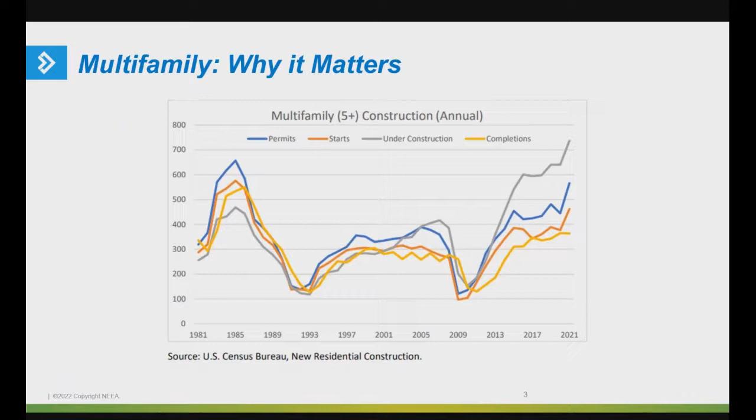So quick agenda for today. We're closing out the intro now. We're going to go over to Rob Aldrich from Steven Winter Associates, and he's going to give us a little bit about heat pump water heaters in multifamily buildings, focusing on integrated units and the unique challenges there.

After some questions with that, we're going to go over to Duane Jonlin from the City of Seattle, and he's going to give us a little bit of a case study and some structural changes, an innovation to the structure of the code itself in Washington related to low-rise multifamily. And I'll provide a little cameo at the end of his presentation as well. After some more Q&A, we'll close it out and call it a day. Next slide, please. All right, so now I want to pass it over to Rob to start with our first presentation.

Thanks. My name is Rob Aldrich. I'm an engineer with Steven Winter Associates. I'm in our Connecticut office. We work on the East Coast, Northeast, Mid-Atlantic, offices in Boston, Connecticut, New York, and DC. And we focus on better buildings in lots of different ways. We're about 140 people all told. We focus on efficiency, sustainability, health and resilience, accessibility. I'm here to talk about a very specific topic, and that's heat pump water heaters.

And as Kevin said, integrated tank heat pump water heaters. This is the type of product I'm talking about. It's a tank of water with a heat pump on top of that tank of water, which extracts heat usually from the surrounding air and moves that heat into the water. The first kind of evaluation project I worked on was here in Connecticut back in 2001. And this technology has kind of come and gone over the years. There were some improvements needed with the products that we evaluated back in 2001, but to a large degree, those improvements have been made. Products now are a lot better, a lot more reliable than they used to be.

I do want to say my experience is really mostly in the Northeast, New York and New England, in colder climates, climate zones 4, 5, and 6. I'm going to try to generalize for the whole country, but do keep in mind that my perspective is a little bit tempered by challenges in cold climates. So I want to just put that out there up front. So I see a lot of screw-ups with these systems applied in multifamily buildings. Very often in the Northeast, we see them installed in the basements of single family homes, and they usually work pretty well.

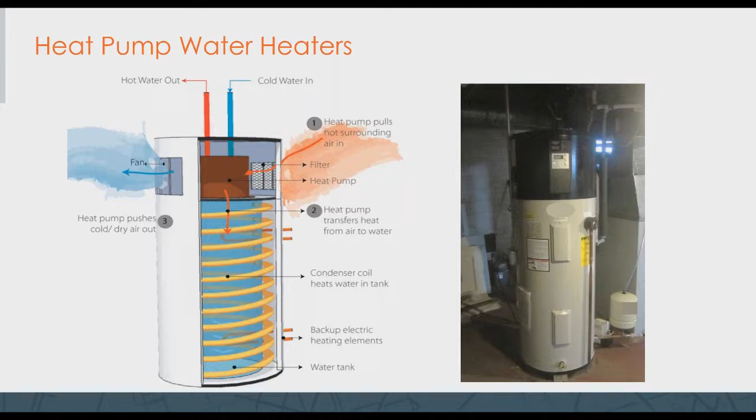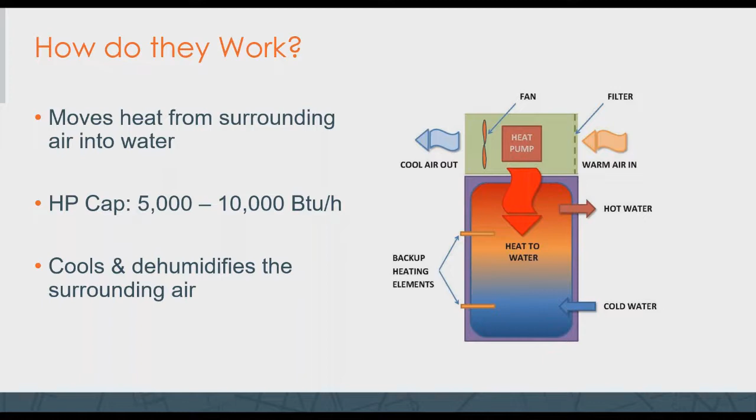I'm going to say this again because this is what I think people miss: these devices extract heat from the surrounding air, or sometimes you can duct the air to them and from them, and they move that heat into the water. That means that they cool and dehumidify the surrounding air. Sometimes that's great, sometimes that's not so great. I also want to mention that most products do have backup resistance heating elements that will kick in when the heat pump cannot keep up with demand, or when the incoming air is just too cold for them to operate.

I'm hopefully not beating a dead horse, but integrated heat pumps remove heat from the incoming air and transfer that heat to the water. That means the air coming out is about 20 degrees cooler. So if the incoming air is 70 degrees, we have somewhere around 200 CFM of 50-ish degree air coming out.

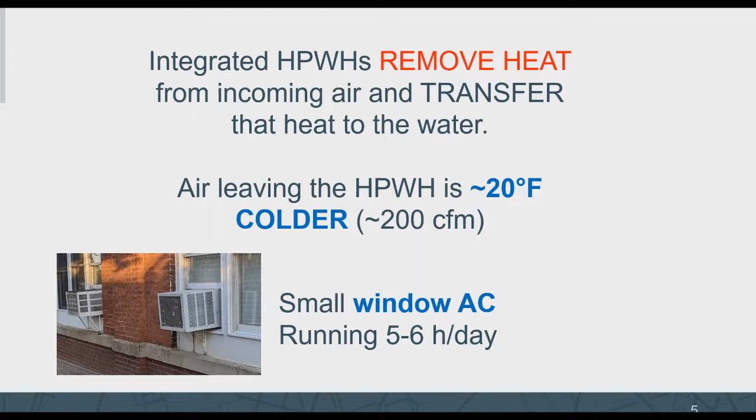One analogy that my colleagues told me really hit home for them: it's like running a small air conditioner 5 to 6 hours a day. If you have a heat pump water heater in the basement of your home, it's like running a small window AC 5 hours a day. It's a significant amount of cooling if the heat pump is doing all the work. And that is the factor that I see people miss, and they misapply this technology.

So again, these can work very well. They can be very efficient. The key to the efficiency mostly has to do with limiting the use of that electric resistance. As I said, there are backup resistance elements in most of the tanks. You can do that in several ways. One is a bigger tank, so you have more hot water to use before the resistance has to kick in. You can keep the water hotter, as long as you install anti-scald valves so you don't scald people. If you have hotter water, you can go longer without kicking in electric resistance.

And certainly warmer intake air helps. The minimum for these to operate with R134A, which is what most of the ones I'm familiar with still use, is in the 40s; the heat pumps stop working efficiently in the 40s. I think below 40, you're not going to get anything at all from these systems. And warmer is better. Certainly the warmer the intake air, the more efficient these things are.

And of course, another way to reduce energy use is to use less hot water. And it also makes these more efficient. If you use 150 gallons of hot water a day in a single family home, this is probably not going to keep up. If you use 30 or 40, there's a good chance the heat pump could keep up with the entirety of that load.

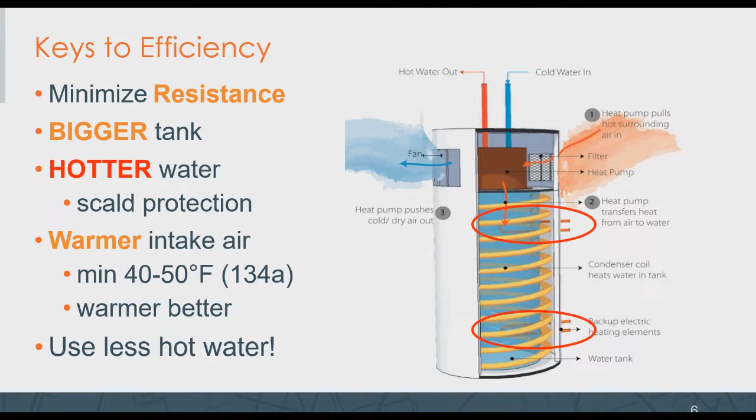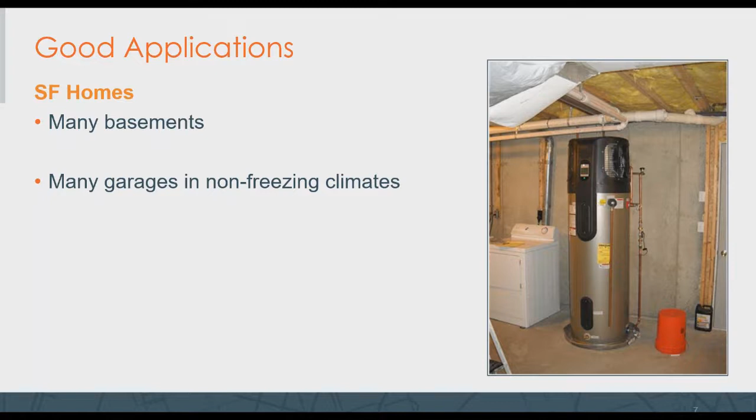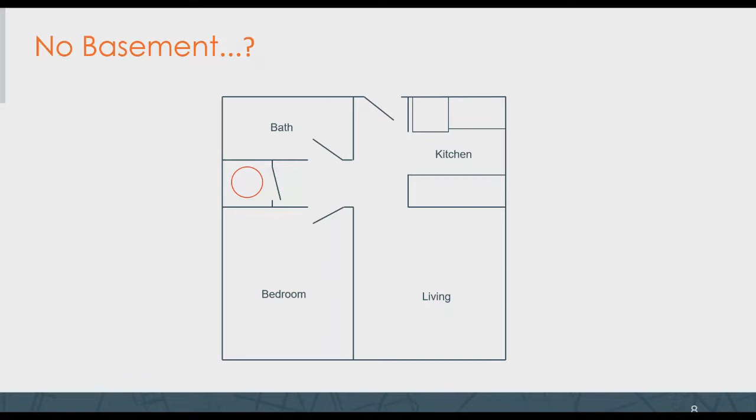So good applications: a lot of basements of single family homes in the Northeast. I know a lot of people put them in garages in non-freezing climates. I get very nervous when people put them in garages in upstate New York, but in a lot of the country, garages are certainly a practical application. If you don't have a basement, you don't have a garage, if you're in an apartment, then what do you do? This is just a very simple example of an apartment plan. Too often, I see people try to put them in closets in multifamily buildings. And this is almost always a bad idea in my experience.

He was saying, God, the utilities begged me to put these in. They were throwing money at me, paid me more than it cost to put them in. So I finally put them in. It was a train wreck, had to rip them all out, put in electric resistance. I'm never using heat pump water heaters again.

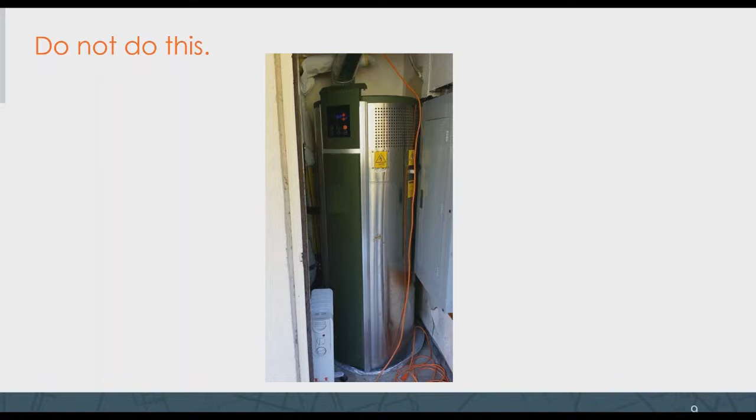So one proposed solution is to put louver doors on the closet door. I have not seen this work personally. I still see that closet getting down to 50 degrees or below, where the heat pumps cannot operate efficiently. This is 200 CFM, and you need a way to really actively move air in and out of this closet. In my experience, just passive airflow through a louver door doesn't cut it.

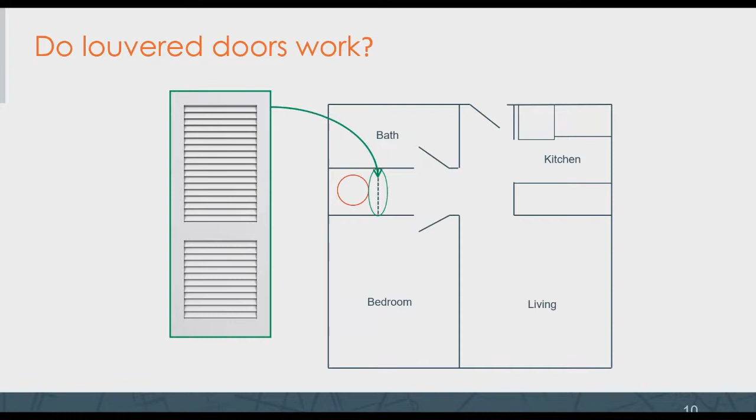The other issue louver doors raise is sound. These things are not silent - they're fairly loud. I think all the ones I'm familiar with are in the 50 decibel range, maybe higher. They're getting better, getting quieter, which is great. And 50 decibels is not hugely loud, but if it's right next to your bedroom and you're trying to sleep, it may be too loud.

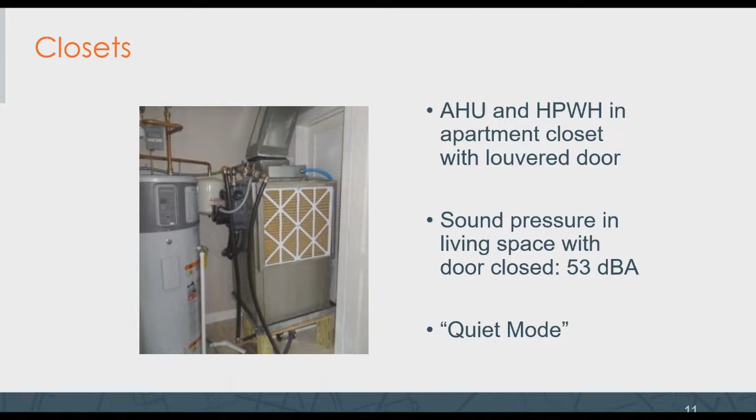This picture is taken with the louver doors open in an apartment. You can see a heat pump water heater on the left and an air handler on the right - I won't comment on the ducting for that. With the louver doors closed, the sound pressure in the living space on the other side was 53 decibels. I've heard building owners having bad luck where residents get frustrated with the noise and switch their water heaters into resistance mode, or quiet mode, so they can watch TV and sleep without the annoyance. So sound is definitely something to think about in multifamily buildings.

So ducting is sometimes presented as a panacea that solves all the problems related to water heaters and closets. If you exhaust the heat pump water heater into the living space and have a louver door allowing makeup air back into the closet, thermally this could work. You might get some short circuiting, but generally you'd probably have enough warm air coming back for the heat pump to operate efficiently. This doesn't solve the noise issue, and you also have about 200 CFM of 50-degree air blowing into the apartment, which may or may not cause comfort problems.

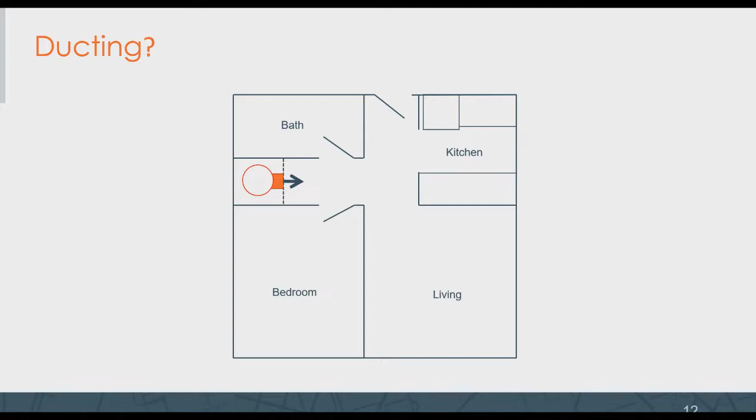If you don't have a louvered door, maybe you soundproof the closet with a gasketed, caulked tight door, and duct both the intake and exhaust. Again, thermally you might be okay, but you're still providing 200 CFM of 50-degree air into the apartment, and you have to figure out how to do that without causing comfort problems. You might get some sound propagation through the ducts, but if you duct it thoughtfully, you can eliminate a lot of the sound problems.

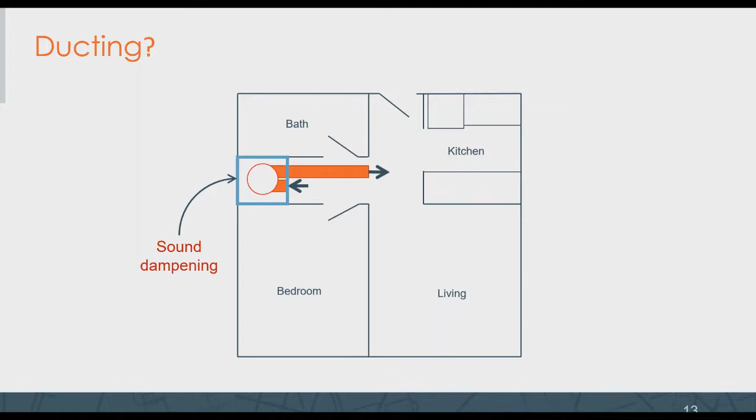This is also very climate dependent. 200 CFM of 50-degree air in a Miami apartment could be great year round. In Chicago, it might be nice for a few months, but for a good part of the year it could be a real comfort liability. So you have to be really thoughtful about how you incorporate these into apartments.

This is an example of what I'd call a qualified success - a project in Connecticut, a gut renovation of an old mill building converted into about 80 apartments. Every apartment has a heat pump water heater in the closet, and you can see one side was ducted - this is the intake to the water heater.

There's some flopping flex duct that could be improved here, but the exhaust came out of the water heater into the closet. This is a fairly large closet, but there were louvered doors separating it from the rest of the apartment, and that cool air just kind of oozed into the apartment, mixing with the air in the living space.

And in general, it worked okay. I talked to the building manager here and got great information from him. He said there were a few apartments, 2 or 3, where the sound and the cool air really were unacceptable to the occupants, so he had to switch them into resistance mode.

When it got cold, and this has been occupied for a couple winters now, going into the 3rd winter, there were a lot more problems. There were more complaints, both comfort complaints and performance complaints, which I don't quite understand. The heat pump water heaters weren't keeping up always, but there were enough complaints that he ended up switching a lot of the water heaters over into resistance mode.

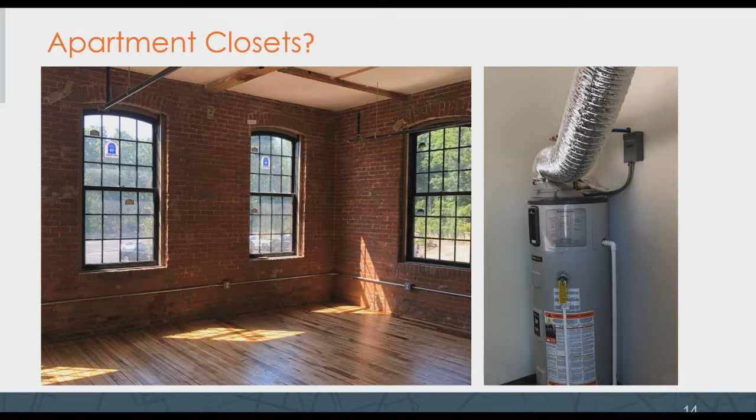Ducting to outdoors is something I never recommend in a cold climate, at least with the equipment we have now. In milder climates, it may be viable. So think about your climate, think about your application.

One thing I see people propose is ducting just the exhaust outdoors, which I think is just a very bad idea almost everywhere. You exhaust 200 CFM outdoors, that means you're drawing in 200 CFM from somewhere. Where is that makeup air coming from?

Is it 10 degrees outside? Is it 90 degrees outside? Is it coming from the hallway, from your neighbor, up the garbage chute from the parking garage? Uncontrolled infiltration is not a good thing. So ducting to outdoors has some challenges.

Check time. All right, I'm in good shape.

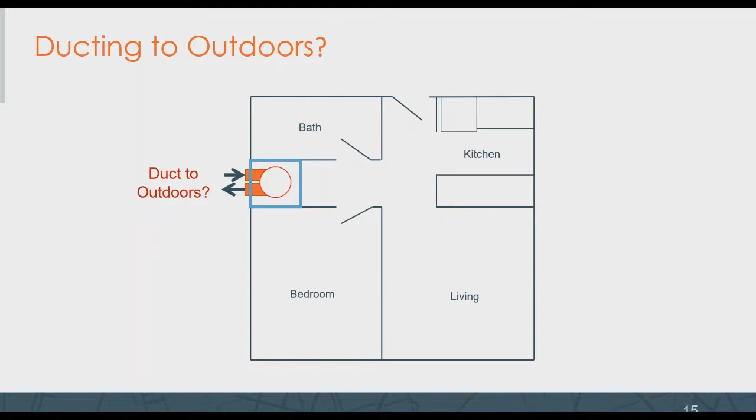If you exhaust the water heater into the corridor and have a louvered door so that air can come back into the closet for the water heater to work, this, I think, has some promise, but I have not seen any kind of real detailed results from this.

You are cooling off the corridor a lot, and that's something you have to think about. You're going to be adding a heat load to this corridor, and that heat load should be addressed as efficiently as possible, not with electric resistance, or else you're defeating the purpose of the water heater. If you have continuous, year-round cooling to your corridor in Texas versus Montana, it's very different, very different can of worms.

So this is one of the things I wish I had some real data on how these systems perform. But anyways, I think it's potentially a promising application.

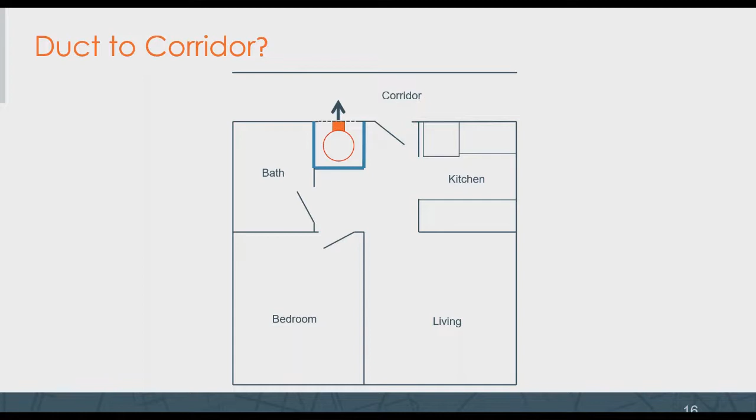So central plants, I've seen several instances of people ganging several integrated tank heat pump water heaters in a central plant. And at first pass, this looks pretty nice. We have nice insulated pipes, and it looks like there's nice reverse return plumbing.

A couple of my colleagues were involved in this project, and they just happened to mention it to me, this approach, and to me it sounded horrible. They were kind of baffled as to why, and nobody realized why. The engineers didn't realize why, the utility didn't realize why, the plumbers didn't realize why.

What you're doing here, this is about a 25 unit building being served by these 6 water heaters. It's extracting heat from this mechanical room, so all the heat for the hot water to 25 apartments is supposed to come from the air in this mechanical room. I was very concerned that there was not enough heat in the air in this mechanical room to provide all that hot water.

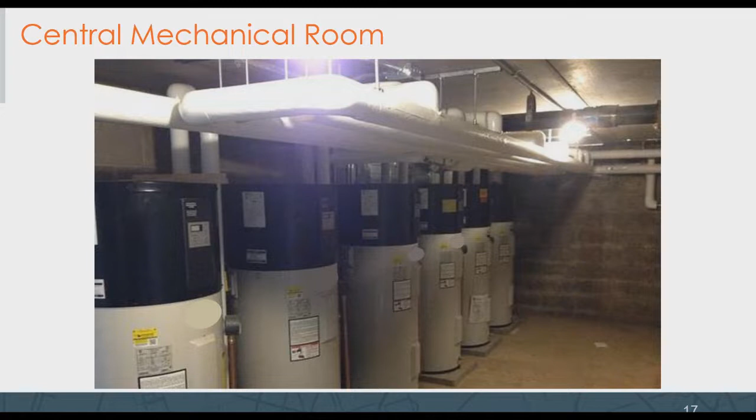One of my colleagues went to inspect this system to see how it was performing. She saw a huge electric resistance heater up in the corner, and in the other corner, another big electric resistance heater. She found that both of these heaters were running for several hours a day in August when she inspected it. So with 80 degrees outside, we had two big electric heaters running several hours a day to heat this mechanical room so the heat pumps could move that heat into the water.

There's just a fundamental gap in understanding how these work. What you have here is a central plant electric resistance water heater that was very expensive. It may have modeled great when you plug in an energy factor of 3 into your models, and got great incentives, but it's effectively a central electric resistance plant. So think about where the heat's coming from that these heat pumps are going to use to heat the water.

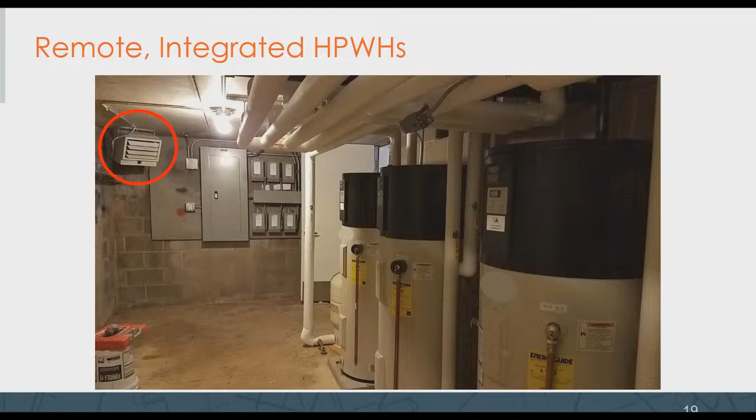And it's possible to do this well. This was a bad example, I don't recommend it, but it's not out of the realm of possibility if you do a considerate, thoughtful design. Perhaps in the summer you can bring outdoor air in for two or three seasons. You want to be careful of filtering, screening, pests, humidity, and so on. There are things to think about if you bring outdoor air into the space, but there is certainly heat in the outdoor air in August. We shouldn't be using resistance heat to heat that air.

Maybe you can have a ductless mini split heat pump heat that space. Not nearly as good as using free heat from outdoors, but better than electric resistance. If you're using a heat pump to heat the space and then another heat pump to heat the water, as long as both COPs are above 1, you're going to be better than resistance. Maybe not tons better in some applications, but you're going to be better than resistance. So again, it's worth being careful, it's worth being thoughtful, but don't just use resistance.

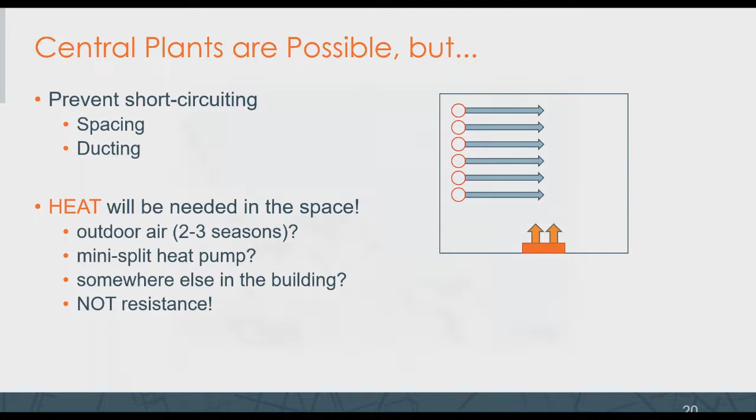So that's it for integrated tank heat pump water heaters. Just a few minutes to talk about other options.

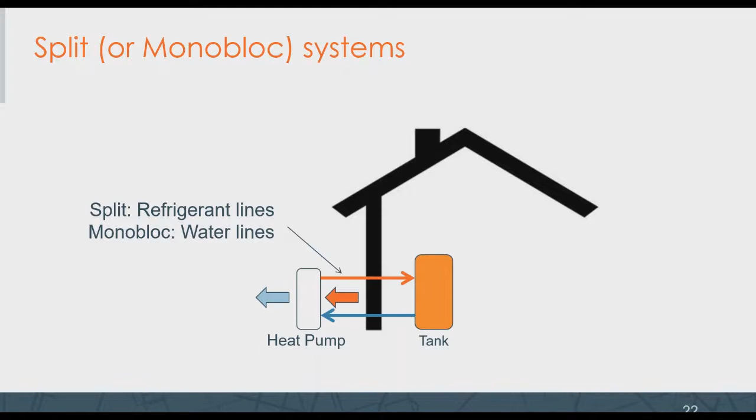Certainly, if you have a split or monobloc system where your evaporator is outdoors, I'm sure people have seen them. You have an outdoor unit that looks like a heat pump outdoor unit - and it is a heat pump outdoor unit. Sometimes you have refrigerant that connects the indoor and outdoor units. Sometimes you have water lines that go outdoors, water gets heated up, goes back indoors to a storage tank. This solves the sound problem, and it solves the stealing-heat-from-indoors problem. There are systems like this one, which uses CO2 as a refrigerant. This can operate down well below 0. This circled outdoor unit is the water heater, and the image of the tank is on the left.

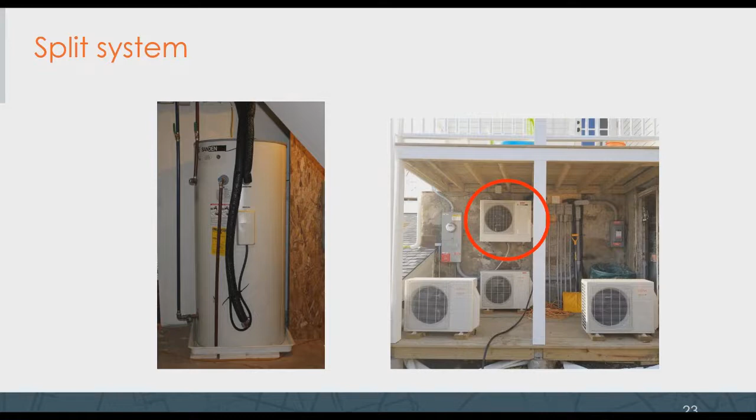This is in Connecticut. It's worked great for a couple years. I'm not going to get too much into the detail of considerations for these systems because I was focusing on integrated tanks, but we've seen folks attempt to scale these systems for a multifamily building - some successfully, some not. This is a project done by Taitem Engineering in Ithaca, New York.

I know other developers who have tried this and ran into big headaches, big hassles - rip-it-out-and-do-something-entirely-different level hassles. It's not a straightforward plug and play system. You have to be very careful when designing these systems. It's a lot more nuanced, and a lot different than just specifying a boiler and an indirect tank, for instance.

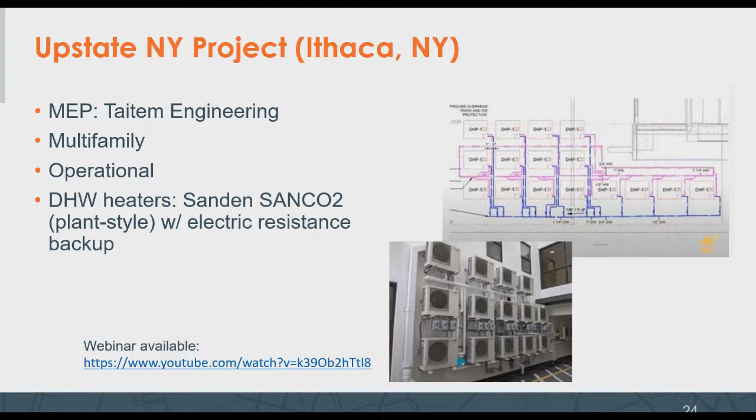But we are working on a lot of multifamily projects. This one is multifamily, which is using Sanden's CO2 system. This is up and operational. We don't have any performance data, although I'm bugging people to try and get some performance data.

We have several other projects in design or nearing construction that are using central heat pump water heaters, largely with CO2. This is a project that's using water source heat pump with wastewater heat recovery, a heat pump to recover heat from wastewater. This is a big topic.

I don't have any silver bullets though. This is early days, at least in cold climates, when heat pumps are intended to run all winter, provide hot water all winter. We're still figuring a lot of stuff out. So stay tuned. We hope to get data from our projects, and we're paying close attention to what others are doing.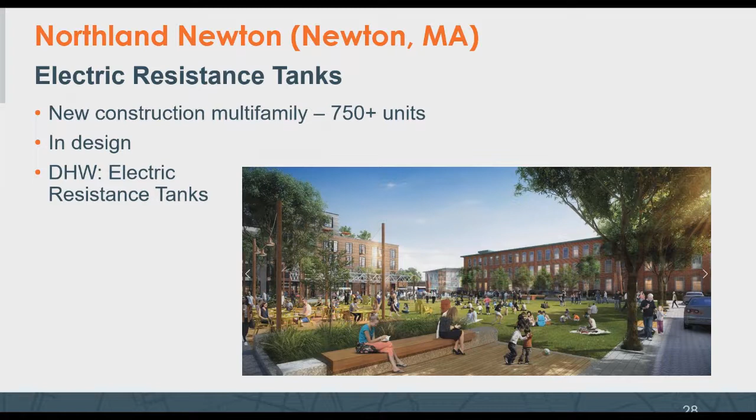They are using electric resistance tanks in apartments, and this is something that we kind of unfortunately keep coming back to. There are still very often projects where heat pumps are not in the cards for various reasons. First of all, there's still a lot of question marks. Even when we do recommend heat pumps and install big central systems, very often there's a 100% redundant resistance because people don't trust these heat pump systems yet.

Cost is obviously a huge factor, but decentralized electric resistance tanks, very well insulated tanks with low flow fixtures, with efficient appliances, insulated plumbing, smart distribution, it's not the end of the world, even though we'd like to have some more satisfying solutions that get above a COP of 1. In cold climates, we're still coming back to electric resistance quite often, but stay tuned.

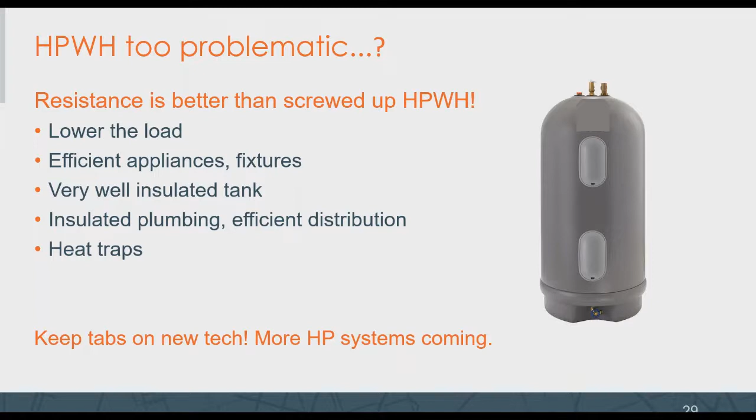And I think that is it. Thank you.

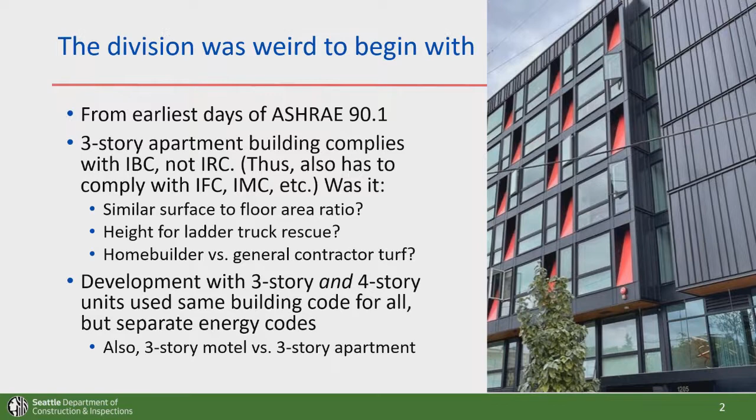This has been kind of a bizarre separation, and there have been some attempts made to move this so that multifamily would all be in one code, but hadn't succeeded up till now. So what we did in Washington State was simply change the definition of what a residential building is, to exclude group R2.

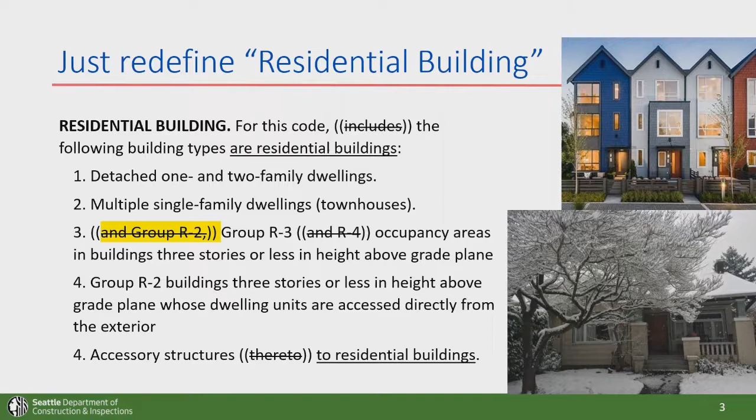That picture on the bottom is my house last winter. So we've got regular single family houses and townhouses as residential buildings, and that's it.

We did make an exception for what in this part of the country we refer to as woody walk-ups. I think of them as California style apartments or garden style apartments, but those that have exterior entryways, we allowed those to choose either between the residential or the commercial provisions if they wanted to go there.

And this partly had to do with the fact that it looked like for those kind of apartments, the energy use would be lower sticking with the residential code, and also that those little apartments are sometimes built by regular home builders. So any other kind of apartment building that has interior corridors used to access the apartments would now use the commercial side of the code. So it's a very simple code change.

One thing I wanted to say, just as a cautionary tale, is that the thing with the woody walk-ups was kind of a late adjustment to our code language, and we said, okay, they can use the residential energy code requirements, but if you look in the residential energy code about heat pump water heaters, which we now require for single family, it says it only applies to single family and townhouses. So it's not even clear

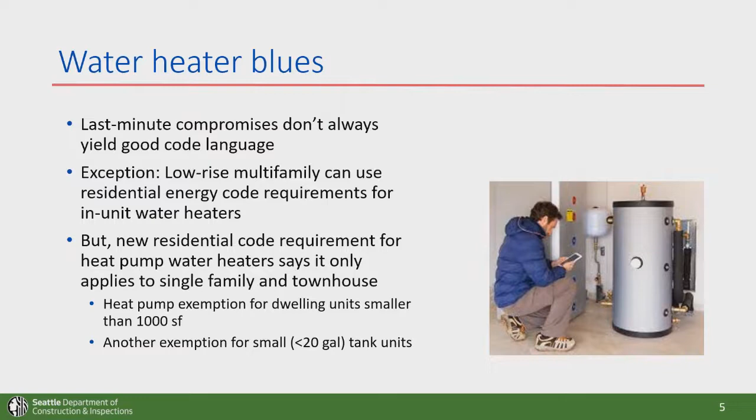what happened there. If it is interpreted to say that yes, the residential code requirement for heat pump water heaters does apply, there's an exemption for dwelling units smaller than 1,000 square feet, which at least in this part of the country would include almost all apartments, and another for those little dinky 20-gallon or smaller units. Just to say, writing code language is always dangerous.

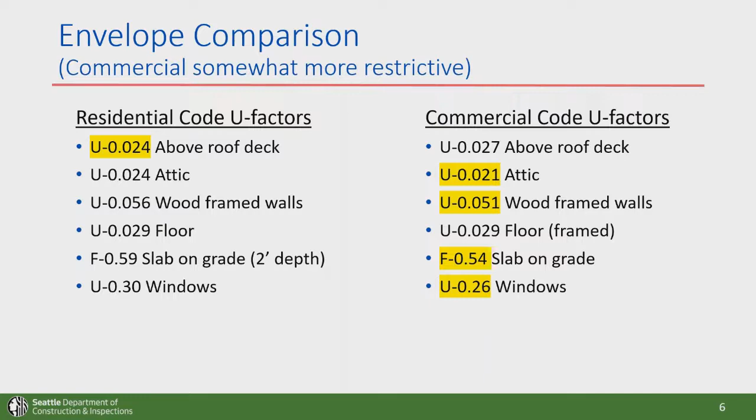In looking at the two, we can see that those highlighted were the more stringent values. The commercial tends to be a little bit more restrictive, not tremendously, but a bit. We also rely in both codes in Washington on our additional efficiency credit options table, where everybody has to do a certain number of above code things.

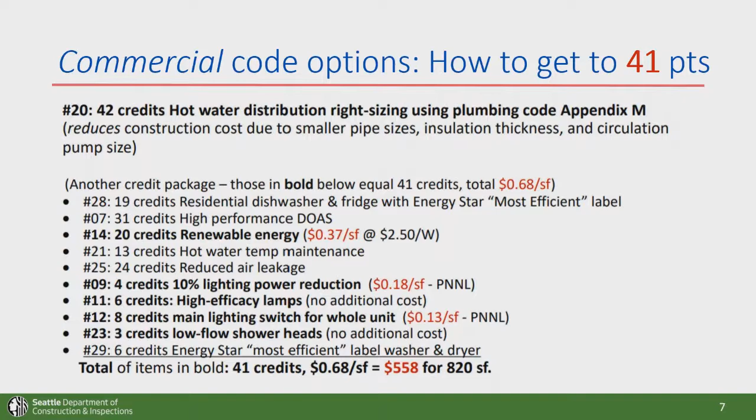And this ended up actually reducing construction costs because the pipe sizes are smaller, the insulation gets thinner, the circulating pump gets smaller. So with a single option you get enough credits to get your 41 points. Or you could select, I have a list of things I looked at there, the ones that I put in bold add up to 41 credits, for a modest amount of money.

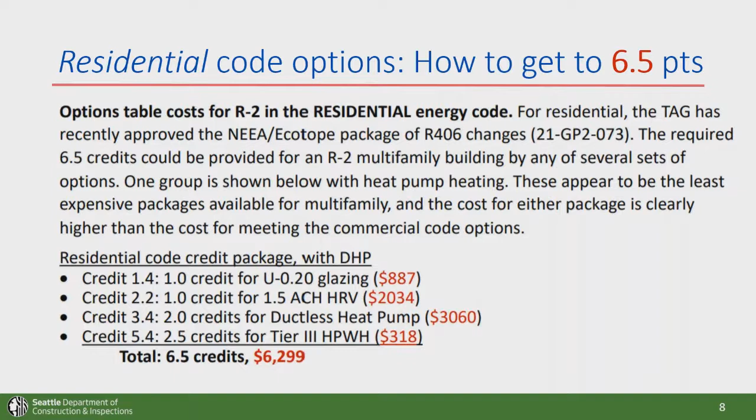In the residential code, we have a whole different system for what these items are worth, but as a typical method of how people would achieve their 6.5 credits, that was coming up to 10 times what it costs for the credit system in the commercial code. So it started off with a lot of resistance from the home builders and other industry people, and then eventually melted away to the point where they said, well, okay, we won't vote against it. They abstained, which was kind of a victory.

I did want to say before we finish that with all these things we're doing, we look carefully at all the other impacts we're making as we do these changes. Make sure that people are well taken care of, and then we won't give ourselves a bad image as we move forward into this more advanced level of energy efficiency. So that's it. Just a very simple change to put all the code language for multifamily buildings into the commercial side of the energy code.

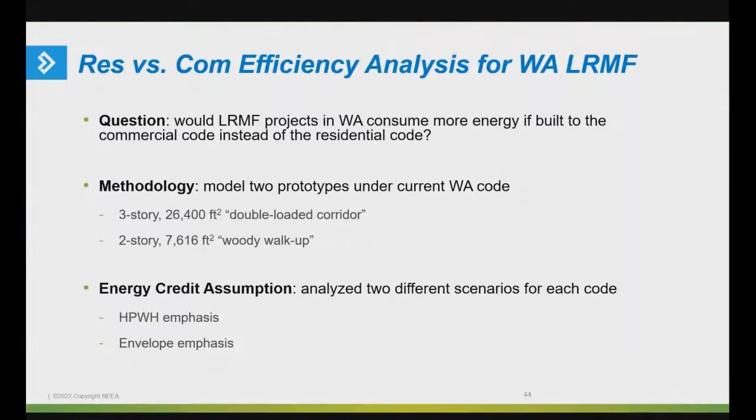Thanks, Dwayne. As I previously mentioned, I'm going to provide a little bit of extra because NEEA had the joy of being involved with this proposal, with working with Dwayne and the award-winning Washington Energy Codes group that works together to do some real impressive stuff for Washington State.

NEEA wanted to take a look at this when it was in the ideation stage. Dwayne laid out all the good reasons why we should be looking at this arbitrary division between residential and commercial, and maybe do something about it. And we're not the first to raise those questions in Washington, certainly. But we wanted to make sure that if we were moving low-rise multifamily from residential to commercial, that we weren't working against ourselves from the energy efficiency perspective.

So NEEA funded some research to answer the following research question: would those low-rise multifamily projects consume more energy complying via the commercial code than they would the residential?

So very quickly on our methodology, we modeled 2 prototypes, which represent a fair amount of the multifamily construction in Washington. Probably typical in lots of the country, a double loaded corridor building. And then what Dwayne mentions, what we call the woody walk-up type, which I think is a smaller portion of the national percentage of multifamily, but that probably varies by local market. So those are some regionally approved prototypes. If those exact figures look unfamiliar, in the Northwest we've been using specific prototypes and modeling criteria for a long time, and so that's where those come from.

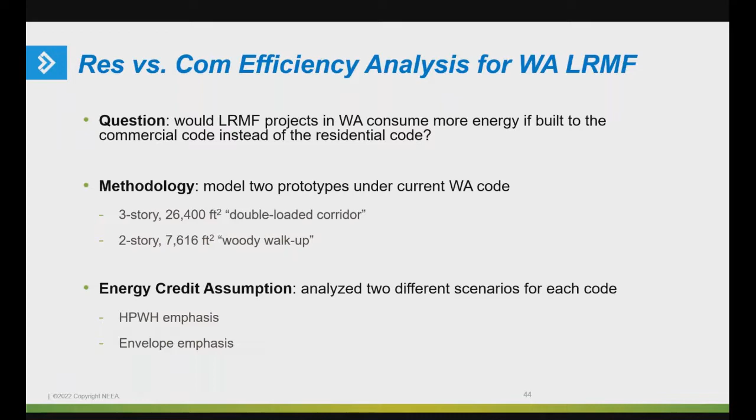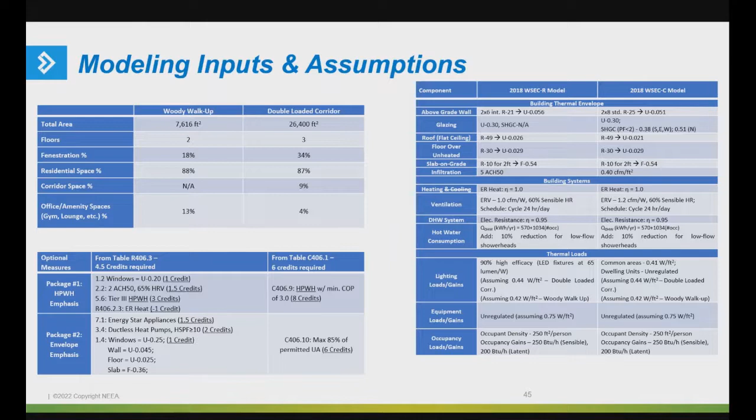So if you go to the next slide, you'll see very quickly all of our modeling inputs and assumptions, just in case folks want to revisit this after the fact. Go on to the next slide and we'll get to the outcome of this research. Again, we were looking to see if we would work against energy efficiency by moving residential low-rise multifamily into the commercial code. So the first thing we looked at was the baseline before doing anything with energy credits.

And if you follow the green circles in the tables on the right of the slide, you'll see that the EUI, energy use intensity, for commercial, we found to be lower than that of residential. So early indication was that for both the double loaded corridor and the woody walk-up prototype, the commercial looked like a pretty good option.

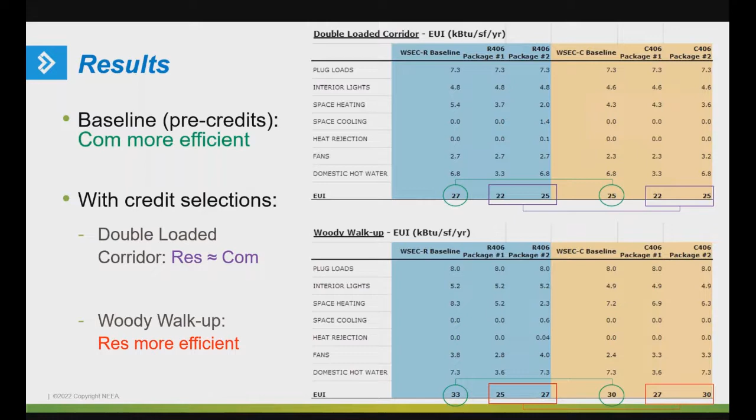So what does all of this mean? It's a Washington-focused case study, and you heard that in our next code, which was just approved over the past couple of weeks, we will be moving the non-woody walk-ups, if you will, to the commercial code, with the woody walk-ups given the choice of which code path they want to go for.

Outside of Washington, this same matter of the arbitrary division between 3 and 4 stories exists almost everywhere, right? And different builders and developers being forced to do something very different once you go from 3 to 4 is something that folks might locally have interest in innovating on and doing something about. So if you're interested in taking a look and want to make sure that from the energy efficiency perspective you have good information for that decision making, you could maybe replicate something like what we did in Washington. Again, our code differs pretty significantly from the IECC, given all of our strengthening amendments and our complex options tables in particular, but you could replicate the sentiment of our analysis.

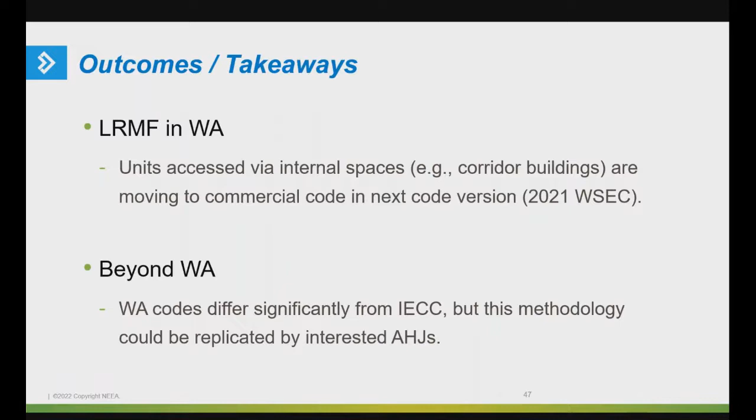And I now have to reorient myself with the questions. Richard, did you see anything come in for Dwayne or myself while I was talking?

Just one here recently. It says, with all the concerns about sound and exhaust air temperature loads in a single family home, why are utility companies pushing for heat pump water heaters instead of tankless gas fired water heaters that would resolve the sound and EA issues, as well as gain savings by not needing to maintain the hot water temperature at the storage tank?

Okay, Dwayne, that might be to you. Sure. Although I think it might actually be directed to our first presenter, but oh yeah, yeah.

We're bound and determined to wring all the fossil fuel use out of our buildings over the next couple of decades, and so further use of fossil fuel for water heating is not on the table. And there are pretty easy installations, especially for new construction, that take care of the problems with noise and anything else you've got concerns about. Multifamily, I wouldn't do it in a little apartment, but for a single family house or a townhouse, we got lots of options to make this be part of an integrated building design.